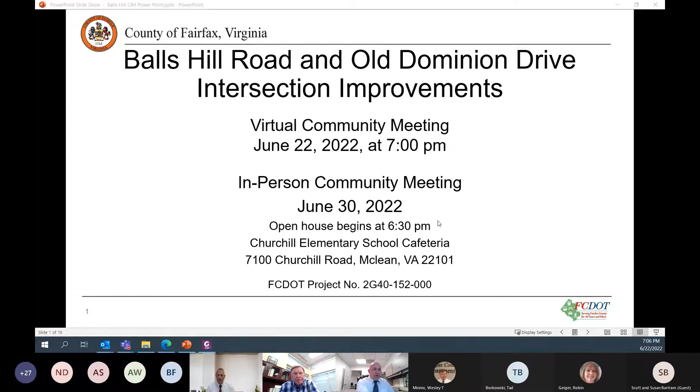So we're going to run through the meeting agenda real quick here. We'll do introductions so that everybody can get a feeling for the team and know who all is working on the project. Then we'll do a project overview, run through the recommended alternative, the proposed intersection design, the walkway connections, what proposed walkways we have and how they're tying to existing walkways. Then we'll do traffic analysis, land acquisition, tree impacts, utility relocations, anticipated schedule, and then we'll open it up for public comments and questions.

So I am Jared Kerr, the project manager. I work for Fairfax County Department of Transportation in the Transportation Design Division. Our utility coordinator is Tan Nguyen, who happens to not be here this evening; he couldn't make it. My direct boss is Brooke Corsciati, she is the section chief for the Transportation Design Division, and she also is unable to attend this meeting this evening. And then we have Todd Minnix, who is the chief of the Transportation Design Division, and he is here this evening. We also have the director of Fairfax County Department of Transportation, Tom Biesiadny, here with us as well.

And then we have from Rinker Design Associates, also known as RDA, the roadway transportation engineers doing the design for us. We have Adam Welschenbach, the transportation engineer and project manager on the consultant side. Also, though not listed here, we have Nikhil Deshpande, the hydraulics engineer, who deals with where the rainwater goes, doing the stormwater management ponds and drainage design. And then we also have with us from Kimley-Horn, the transportation and traffic analysis engineers, Andy Smith and Jeff Giffen, who are focused on the signal design and the traffic analysis associated with the project.

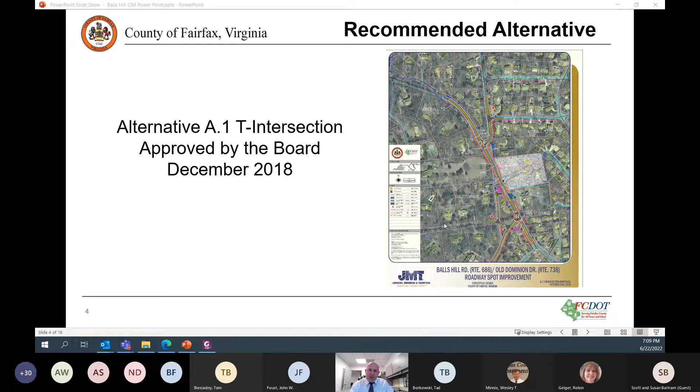It's not the easiest to read here, so we'll shift over to a picture with a better layout. This has been rotated 90 degrees, so Old Dominion Drive is running across the horizontal section here, and the Balls Hill realigned section is on the top and bottom of the sheets that connect.

For those watching virtually, this section up here to the left is Balls Hill, and it's going to realign. Then this section down here to the south is also Balls Hill, where it's going to realign. So we're going to have two T intersections with proposed signals at each.

This option was selected because it makes the intersection smaller. Right now with one intersection, you have a pretty big, wide open intersection. Realigning them into two intersections makes it much smaller and easier for drivers to navigate because there's not as much confusion. The roads will be aligned and signed better.

For those of you that drive this road every day, I'm sure you know where Balls Hill and Old Dominion Drive are. But for people who don't drive this every day, when it's realigned, it'll be much easier for them to navigate without confusion.

It's important to note that Old Dominion Drive is posted at 40 miles an hour up until the existing intersection, then changes to 35 as it comes into McLean. Balls Hill Road is 35 all the way through, and we propose to keep the same speeds throughout.

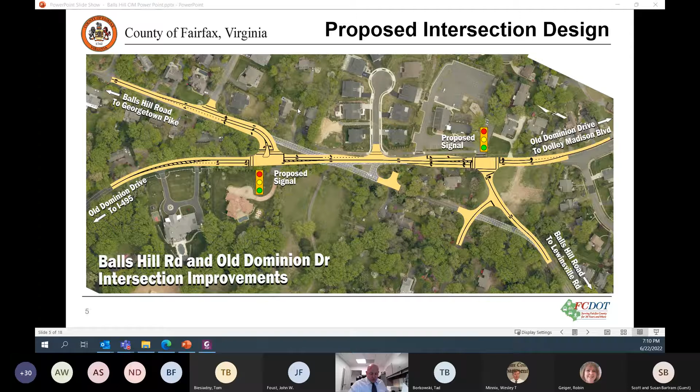We're going to propose walkways from Churchill Road, which connects into an existing walkway, all the way through the project, through the newly realigned intersection. It will tie in, cross over on the north side, run up, and cross over at the second, or easternmost, walkway intersection realignment. It'll cross over to the south.

Then it'll connect to the existing walkway on the other side of Van Ness. On the south side of the project, or south side of Old Dominion Drive, we're going to start a new walkway at the beginning of our project, at 7201 Old Dominion Drive, and continue it all the way up to Van Ness. We'll also run a piece of walkway down the realigned Balls Hill Road and tie into the existing asphalt trail just down Balls Hill a little way.

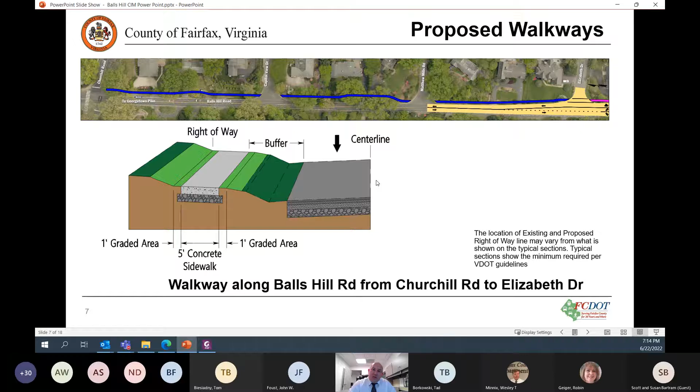It's going to be an offset sidewalk. So what that means is in some areas, it might meander a little more than 5 or 6 feet from the road, and it might be a little bit closer. It just depends on what type of facilities are out there, if we need to minimize impacts to utilities or trees or something else of that nature.

The section that we are looking at right here is kind of the main section of the project. It's from Elizabeth Drive down to the reconnected intersection and then through to the other. So it focuses on the 2 realigned intersections and the segment of road between that.

So here up on Balls Hill, adjacent to Balls Hill from Elizabeth Drive, running back along that first property, we are proposing to put what we call a curb abutted sidewalk. So there will not be a green space from the back of the curb to the sidewalk. It'll just be all sidewalk, and it'll be 6 foot. And the reason we are proposing that is because there is a driveway right here, and if we went any further, we would be into that driveway. So we want to minimize the impacts there.

So when you see this pink sidewalk area here, that is the curb abutted sidewalk. So if you look down on the south side of the road along Old Dominion, you also have pink, or I should say magenta, because that's how I've got it labeled here. That whole area will be a 6-foot curb abutted sidewalk. And again, the reason for that is to minimize impacts to adjacent property owners. Some of the houses at the realigned intersection over here to the east are a lot closer to the road. And then we have a bunch of trees and stuff that we wanted to minimize impacts to.

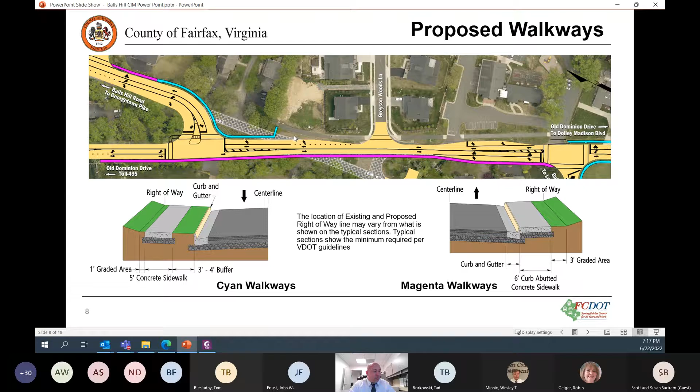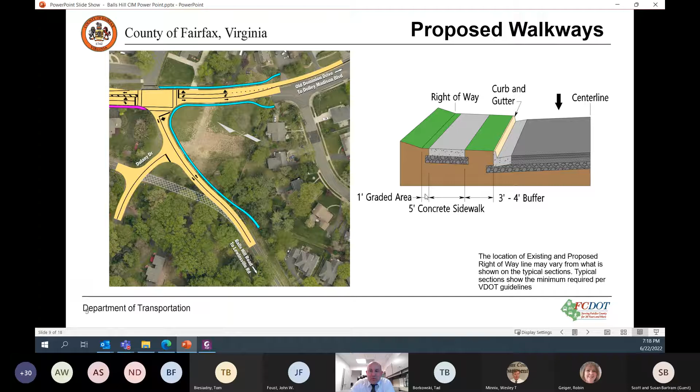Then the final section of roadway is the southern realigned portion of Balls Hill and then running back to Van Ness Court. And that will be basically your same typical section where you have your 3 to 4 foot buffer. In this general area at the intersection, we are going to have a proposed stormwater management pond. So through there, we will have the wide 4 foot buffer all the way through. And then on the other side, up on the north side of Old Dominion, there's a possibility that we would slide the walkway in a little bit to minimize impacts. That's why we say 3 to 4 foot buffer here.

So from looking at the traffic analysis in 2018 and moving forward, we had Kimley Horn do traffic analysis, and as everybody that drives out there knows, this intersection there's a lot of congestion out there, and that falls into what we call a level of service F. So the intersection fails. What that means is there's way more traffic than the capacity of the roadway. Results in very long delays, people sitting at the lights through multiple cycles.

When the roadway is built and constructed and the new 2 signalized intersections are realigned, what we will get is a level of service B. And what that means is reasonable flow. Now, somebody would probably ask, what does reasonable flow mean to one person versus another person? So I think the best way to put reasonable flow is we can anticipate that traffic will only have to sit through 1 cycle of light. That's not a guarantee that every single time you drove through this intersection, you won't have to hit 2 cycles of lights. But generally speaking, you will only have to hit 1 cycle of light.

So what that means is in 2045, if we did not do anything versus if we did do this project, the difference in time that people would anticipate sitting at this intersection is reduced in the morning by about 2 minutes and in the evenings by about 3 minutes. So there's a significant reduction of delay through this intersection. If we didn't do anything, it would only get worse. If we do this proposed alignment, it will get severely better, a lot better.

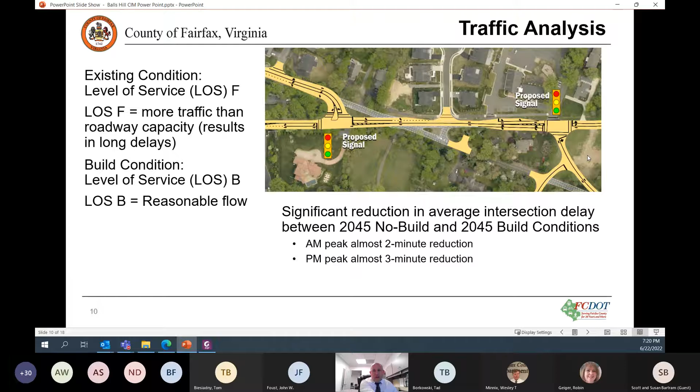On this project, we have already purchased 2 parcels. If you can see the screen over on the far left, there were 2 parcels right here that the county has already purchased. They did that a couple years ago, so there will be no more total acquisitions of parcels. The 2 parcels have already been purchased by FCDOT.

I think it's important to note the difference between right-of-way and permanent easement. Most of the permanent easement on this job is going to be for utilities. When we relocate utility poles or water line or gas line, if it's relocated outside of the right-of-way, we will need permanent easement. I believe on this job the electric poles are going to need some permanent easement, so most of that is permanent easement. The right-of-way dedication is needed if the proposed sidewalk or roadway improvement itself is on what is currently existing private property, not in right-of-way. At that point we would need to acquire right-of-way for the project.

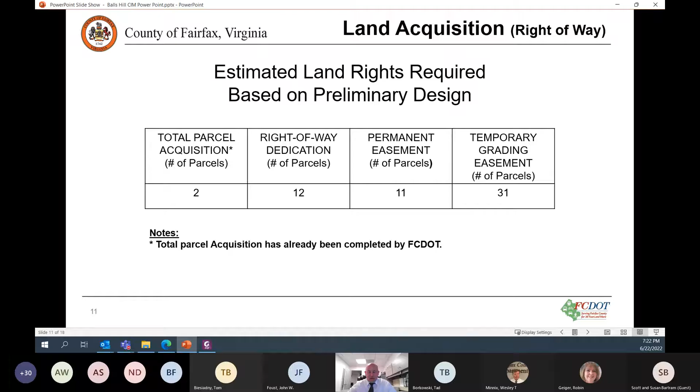As we progress the plans forward, the individuals that have parcels impacted will be reached out to by county staff, and we will explain the process a little bit further at that time to those individuals.

Another impact that is going to be part of this project, and is common with most every construction project, is tree impacts. The construction for this job, both for the roadway and for the sidewalk, will impact some trees. There are approximately 25 parcels where trees will be impacted. It's important to note that some of the impacted trees are in existing right-of-way, some are in an existing public street easement, and some will be on private property. There is a difference as to how we handle those during the land acquisition process, and that will be discussed more with the actual private property owners as we get further along in the design process.

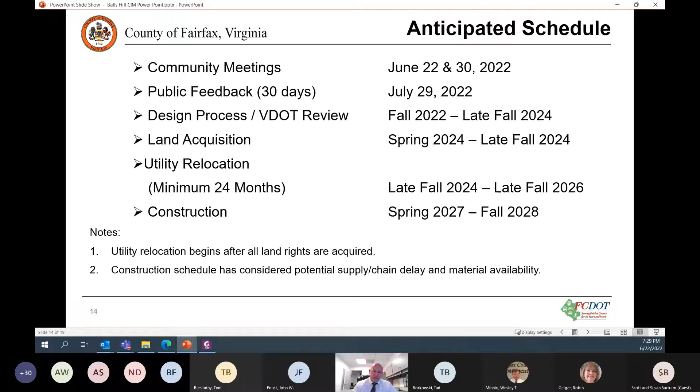If we can get the utilities to move quicker than 2 years, then we might be able to start construction a little bit sooner. So then that rolls into the questions portion. There are a couple of different ways to answer questions here, so I'm going to run through this part of it.

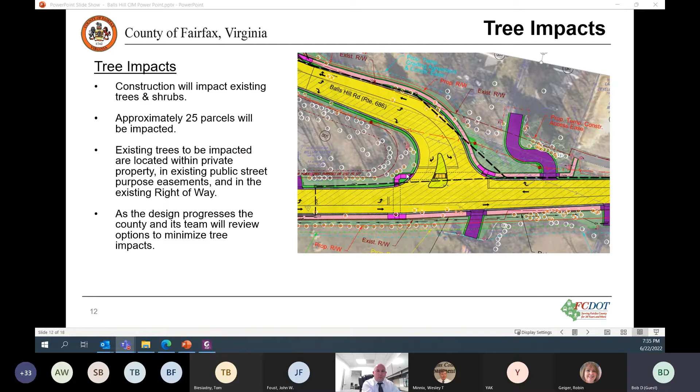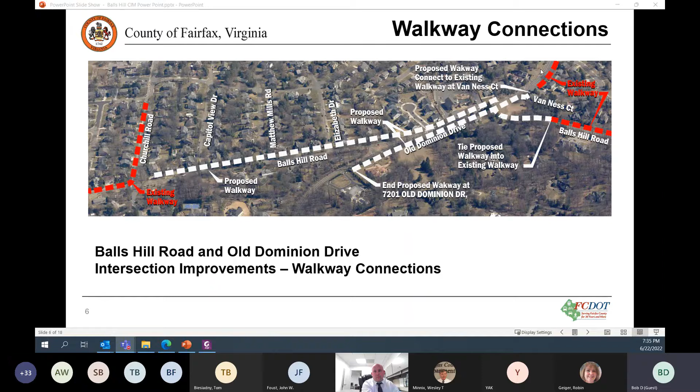First of all, I really appreciate this plan. I think it makes a lot of sense. I've owned a home on Forestwood Drive for over 40 years. I've put up with all that traffic both ways on Old Dominion and at the intersection. What I really am disappointed to not see here, though, is this is an opportunity to make McLean more walkable. And by that, I mean the north side of Old Dominion, from where you currently have it stopping, all the way down to Ernestine, where, as you know, there is a walkway on the other side of Ernestine. It is very dangerous for those of us who live on the north side to walk to places like the community center or Churchill Road without a walkway. And I'm not asking for something really fancy. I just don't see why we can't put some sort of an asphalt walkway the whole way from Balls Hill to Ernestine, so that we would have a walkable, safe community. Is there a reason why you have not included that?

So we did look at including additional walkways throughout the project, and that was an area that we looked at. The main reason at this point that we did not add it is project funding.

The project currently is a little bit over budget because of the current inflation we're seeing. So in order to fit within budget as close as possible, that's why we didn't add sidewalks. There were two areas people are really asking questions about, the one you mentioned and then the one down Balls Hill southbound. But funding limits us to do what we can do now. That doesn't mean we won't look at it in the future, it just means we don't have funding right now for it.

Thank you. Tom or Tad, do you have anything in addition to add to that? No, Jared, I think you covered it. Yep, there's a lot of gaps in our pedestrian network throughout the county, and we would like to address as many of those as possible, but what Jared described is what we can afford to do with this particular project.

Could I get you to pull up the map that shows where Balls Hill coming from Lewinsville makes the intersection, and where you've made the current acquisition on the reservoir pond you're talking about?

There you go. So for residents that live on Balls Hill Road in this section, if we're turning right into downtown McLean, today, in the way it appears from this construction, there's no second lane that would allow a right-hand turn without having to wait as cars back up taking the left-hand turn. So the question is, given you own the property there, is it possible to expand the right-hand turn portion so there's a double lane, so the right-hand turn into downtown McLean doesn't have to wait at the light necessarily and could take a right turn on red?

So originally when we looked at this, it did not meet the warrant for a right turn lane. However, we are going to reanalyze and reassess that. I don't know the ultimate answer, but we are going to look into it.

Yeah, the amount of traffic that backs up, because when Langley School does its release, and in evening times when Google Maps or Waze diverts individuals to come down Balls Hill Road, is pretty significant, and the backup extends pretty significant distances down Balls Hill Road, and it's gotten significantly worse since 2018.

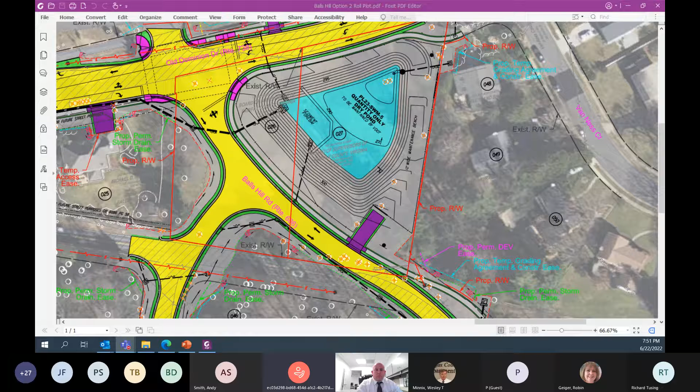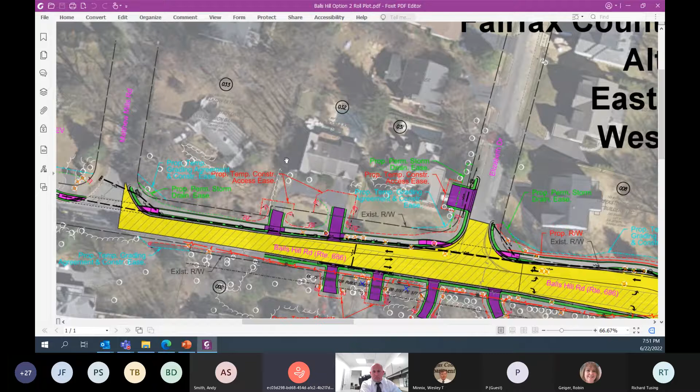I'm on Balls Hill past Matthew Mills, and I had a follow-up question, looking at your aerial map. I was wondering, as you get further along in the design process, whether you can make considerations as far as the configuration of the sidewalk down there. As I understood you, from Matthew Mills down to Churchill you're not going to have that curb. On my property, which is 1117, you're coming in over the existing right-of-way. I wondered if you had a curbed sidewalk there, whether you would be closer to the road, which would minimize the amount of foliage that you'll be taking out.

Yep, so Ms. Meyer, I believe we've spoken about this specifically, and yes, this is an area that we will reevaluate to see if the addition of curb and gutter can pull the sidewalk in so that we are not acquiring right-of-way from your property.

Right, and I wondered—it doesn't sound like you're far enough along to really know that, but I would hope that as you're proceeding with the design process, you'll think about that for all the properties on Balls Hill where you're actually proposing to go over the existing right-of-way. The other thing I wondered if you could touch upon is the movement and relocation of the utilities, and how much excavation should all the property owners expect with that. Will you be just shortening your lines, or will you actually have to move utilities from the house out?

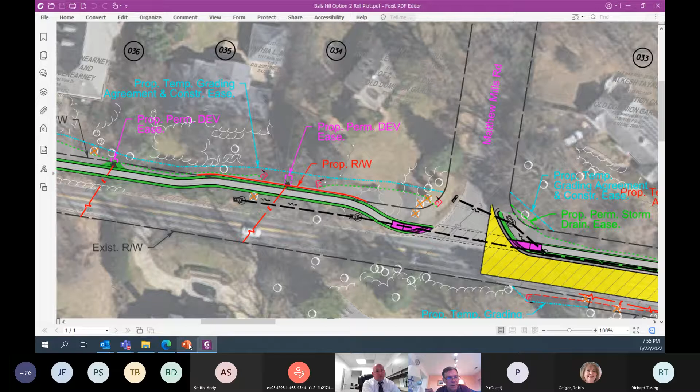Unfortunately, that means digging up your front yard—not the whole yard, but a trench to lay that new line. That's to take these old, 20-to-30-year-old pipes that aren't up to current code and standard and bring them up to code, so you get a safer and newer facility.

Water mains are not quite that way. Water mains from the meter to your home are the homeowner's responsibility, in case you didn't know.

The water line, I understand, because I had that replaced two years ago—the whole line. That's why we were asking if it would just tie back into that new line as quickly as possible from where the new meter goes. Almost all the new service lines we put in, I don't know of any that aren't copper.

In the years I've been with Fairfax County DOT, no—mine's copper, so that's not a problem.

For the land acquisitions, upon request, just for the ones where you've got proposed land acquisition—do you think that as you get closer to a finalized design, you could come out for the land acquisitions and stake where you want that proposed right-of-way, to give homeowners an idea of how far you'd come in?

Yes, we do that all the time. That's done during the negotiations of the land rights, in terms of appraisals, title searches, all this kind of stuff. It's almost exactly like buying a footage of property, right?

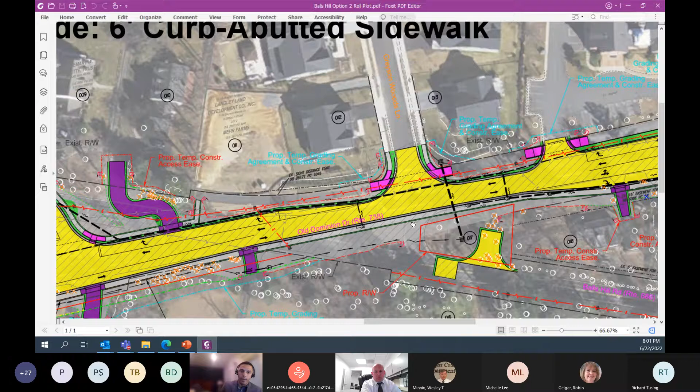So once you have 1 to 2 vehicles that start to queue up at that intersection, that's when you start to see blockages there. And we all know that frequently during the peak periods, far more than 1 to 2 vehicles will stack up at that location.

The good news is with the proposed plan for this area, since we're separating the two intersections, the north signal is moving to about 400 feet north of Graysonwood Lane, and the south signal is moving obviously to the south, so you've got a lot more space for vehicles to stack before they start to block Graysonwood Lane.

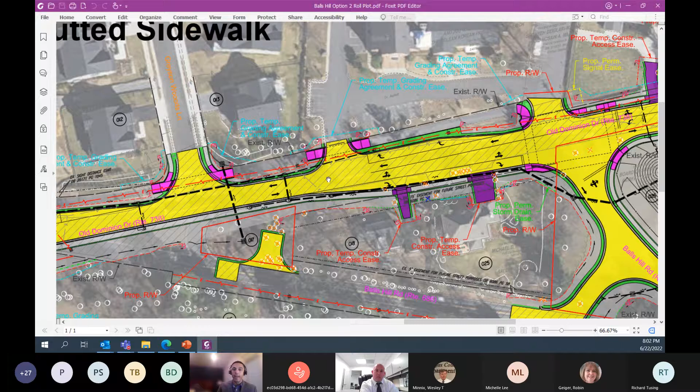Our analysis showed that in 2045, during normal peak conditions, you can never guarantee there won't be some extraordinary situation where queues back up a little farther. But under normal conditions, during AM and PM peaks, the data shows queues are not expected to reach more than 125 to 150 feet approximately, which would be plenty of stacking space before hitting Graysonwoods Lane.

Thank you, Andy. And again, that's just due to the much more efficient operation of vehicles through the area. Appreciate that. Okay, Robin. Okay, great.

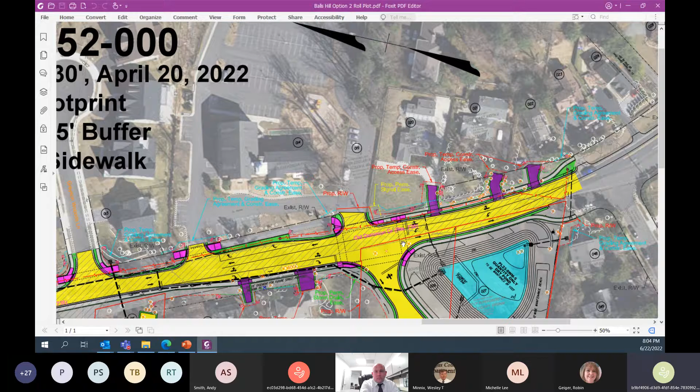So there's a lot I'm worried about. How do we get in and out of our house? Even now, as your previous caller said, coming out to Old Dominion and turning right or left is difficult and dangerous. I'm wondering how all of this is going to be designed, because the traffic light is going to end up right in front of our driveway. So if you could explain some of this and keep that in the design, looking at the driveway of that house as well as its use for the church, that would be wonderful.

Okay, so Andy, do you want to walk through the phasing of the signal there so she might get a better idea of what's going to happen? Sure, I can walk through that.

So the new intersection that's going to be created there actually connects in with the church. As far as maybe driver confusion about going to the wrong location and using that as a U-turn, you're going to have a signal there, and you'll be able to clearly see that is the church parking lot. There's a through-left or shared through-and-left lane for southbound Old Dominion Drive, just off to the left of the cursor.

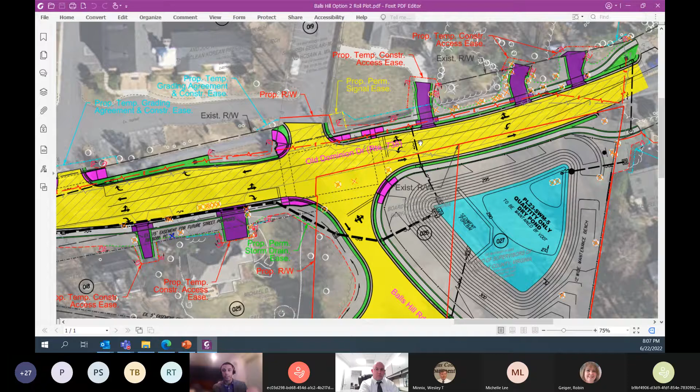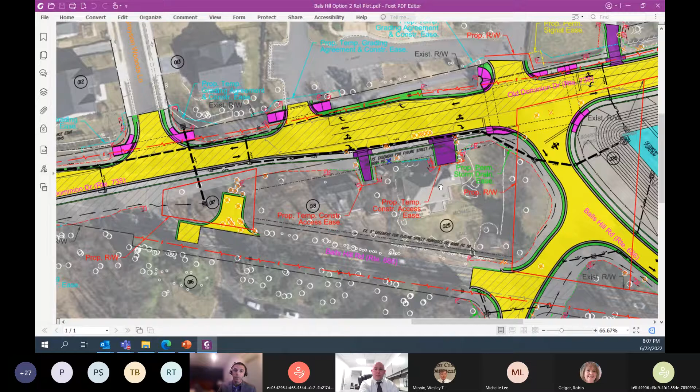As far as the signal operations, because Old Dominion Drive is now operating as the main approach for both of these two intersections, you're going to see a lot more efficient travel along Old Dominion Drive, and queuing will be reduced. Even before, when the signal was further north, you would frequently have queuing that would block and go well beyond the intersection, much farther south during its worst periods. But the intersection is going to operate a lot more smoothly now with the two signalized intersections, with Balls Hill abutting as a side street.

This is Matthew M, I had the same problem, I was banging on the unmute button but it didn't unmute me online, so I called in. I'm the trustee of my dad's property at 7167 Old Dominion, and I have two questions. One, there's a retaining wall noted in the drawing distributed with the invitation. How high is that retaining wall? What's the drop from above grade to, I guess, the path?

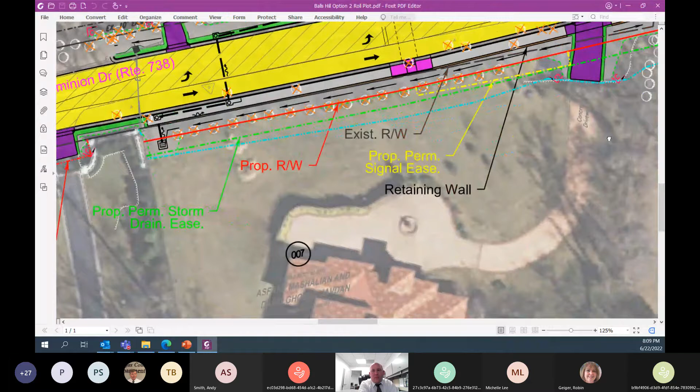So I don't know the specific height of the retaining wall, but I think during design we will be able to get rid of the retaining wall there. Really the main purpose for the retaining wall is the property next to you. There is a septic field right here, and we need to stay off of that septic field. So I don't think we will need the retaining wall to go all the way down as it's shown. I think we can stop it before it even gets to your property.

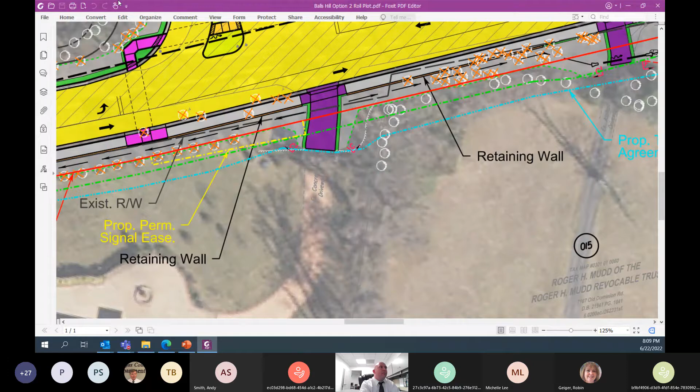Okay, and then there's a proposed storm drain easement. What does that storm drain look like? Is that a buried concrete pipe, or is that an open ditch? Is it gravel? What's the look?

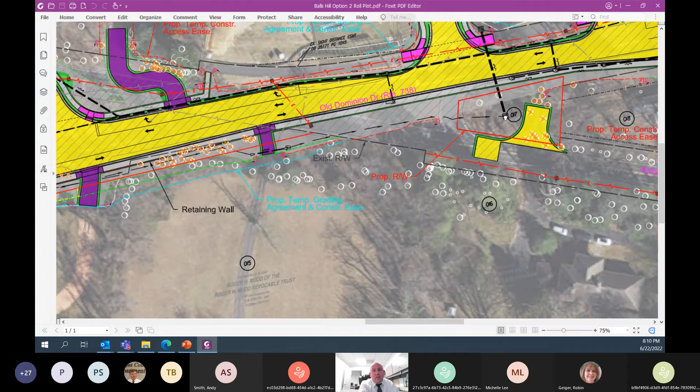Yeah, so right now it is proposed as an open ditch. I'm sure you're aware that the drainage from your property drains towards the road, so we would collect that water before it runs to the road and tie it into storm drainage off of your property. So it would be an open ditch across your property. Like an open concrete lined ditch? No, I don't think there's that much water. I think it would just be a grass lined swale, if you will.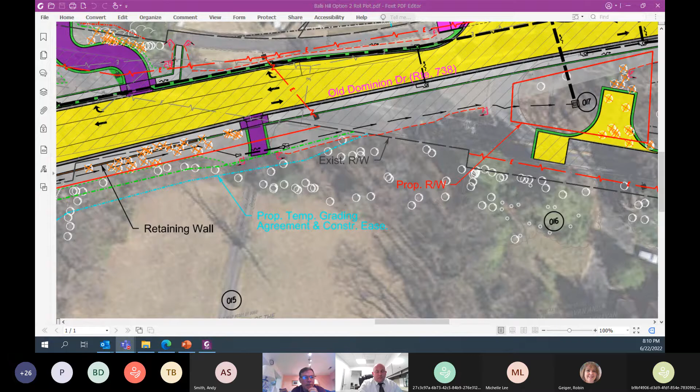I see Todd jumping in. Yeah, there is a pipe under your driveway. The purple is the reconstruction of the driveway, and there's a pipe underneath it near the end. The retaining wall is also there to try to limit some of the tree impacts. You can see a lot of orange X's on the screen - those are trees that would definitely be gone even with the retaining wall. If we take out the retaining wall, that ditch may be further back, and the slopes from that ditch may end up taking out more trees. So that's something we'll work with you on in terms of do we keep the wall or do we get rid of it, keeping in mind that you may lose more trees by getting rid of the wall.

Right, no, and I guess the retaining wall is not objectionable as long as it's not 6 feet or something scary. I can't imagine it would be more than 2 feet. Yeah, as I recall, it's something like maybe 2-3 feet tall max. Depending on how tall it is, if it's over 30 inches tall from the top of the wall down to the sidewalk, then there has to be a railing along the top of it to meet code. So that's another thing to think about as well.

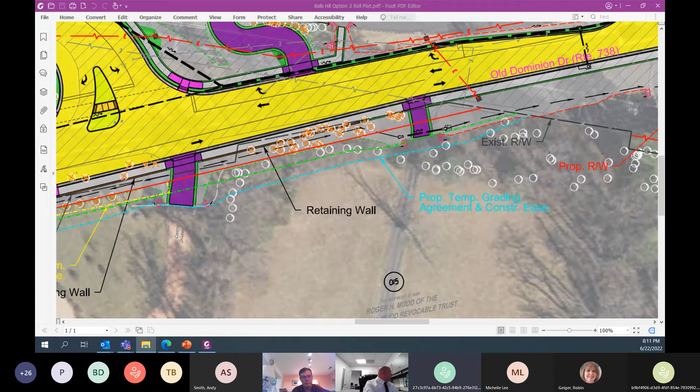Got it, okay, well I appreciate it. And thanks for your time and patience late in the evening to listen to our questions and concerns. And thank you for calling in. Yeah, thank you. Okay.